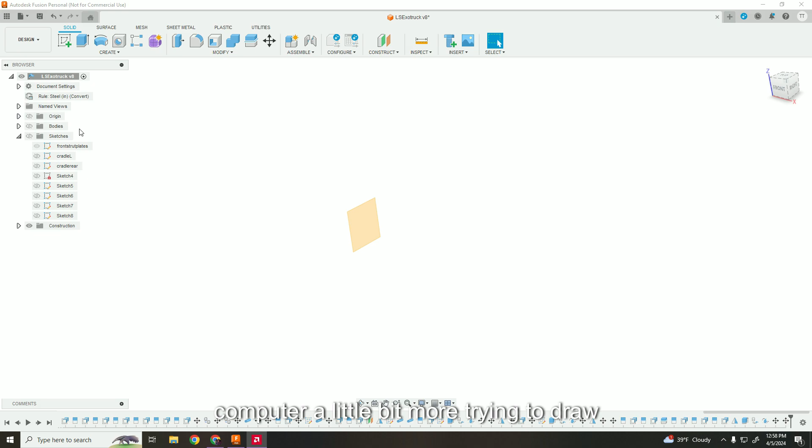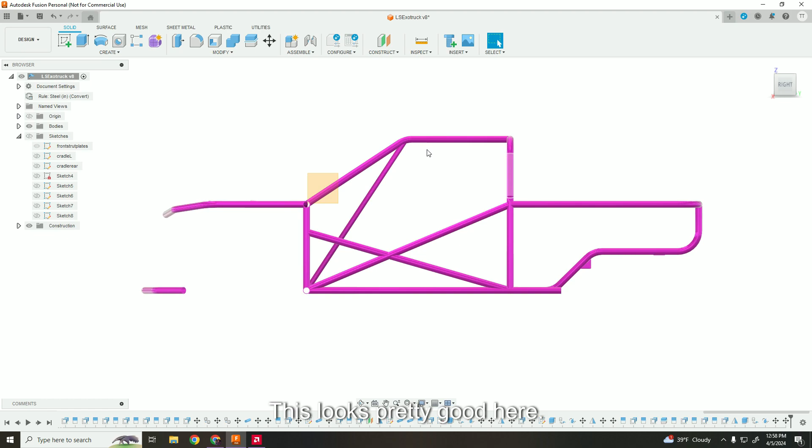So I've been sitting here in front of the computer a little bit more, trying to draw up basically the handful of tubes I already have bent downstairs for the LS truck. And this is pretty much what I've come up with so far. Obviously some of these tubes aren't done yet, but the whole point of this modeling thing is I can give it looks, and to me this looks pretty good here.

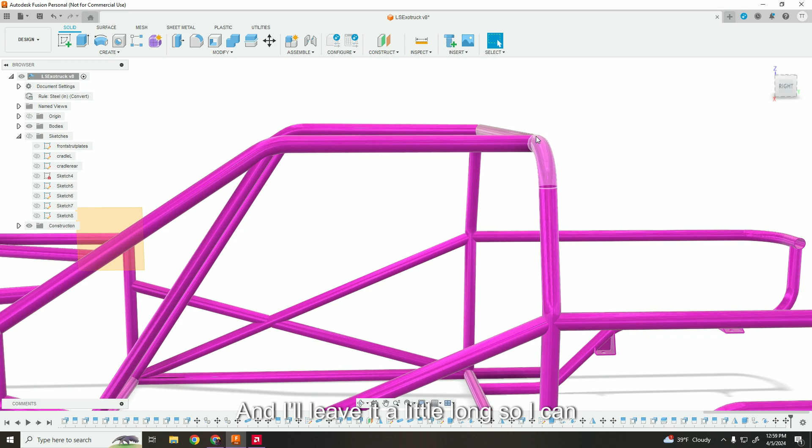So I know that bending this out is about 30 inches, and then down, I forget the dimension, but I could plug that into my Bendtech software and get this tube bent without trial and error basically. And then I'll leave it a little long so I can notch it. I usually take about a half inch off for notching. Down here there's a bit of a compound angle notch to it.

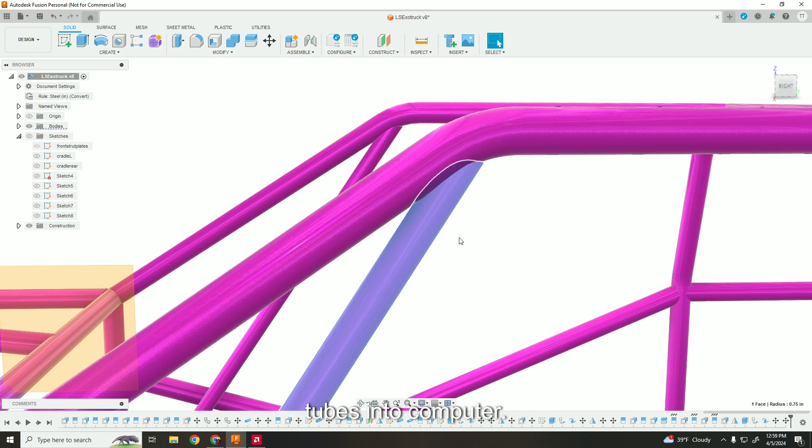And then this tube here, I can notch these tubes in the computer using commands like split face, and then you subtract. I'm not going to get into that. There's a lot of very good videos on YouTube already about using split face commands.

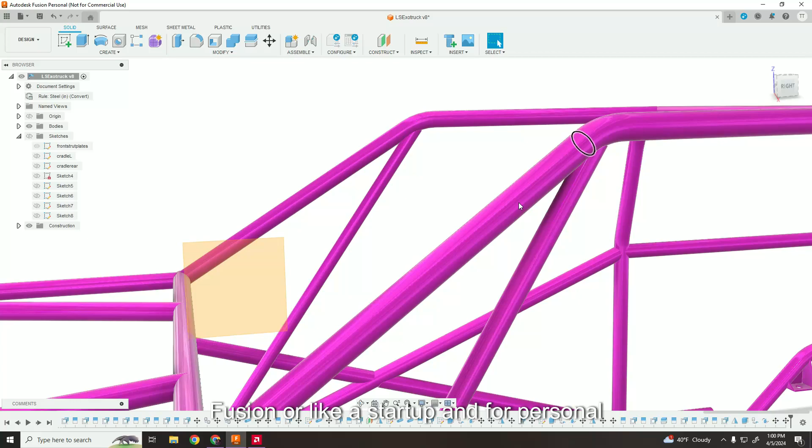But I never really used Fusion software until a couple years ago when I lost my AutoCAD at work. So it was definitely a learning curve. Some of you younger guys in school, this is probably a lot more natural because it's all you've worked on. I think Inventor's very similar, maybe even SolidWorks. But Fusion for a startup and for personal use is free. So I don't have all the features, but I have enough to draw these chassis.

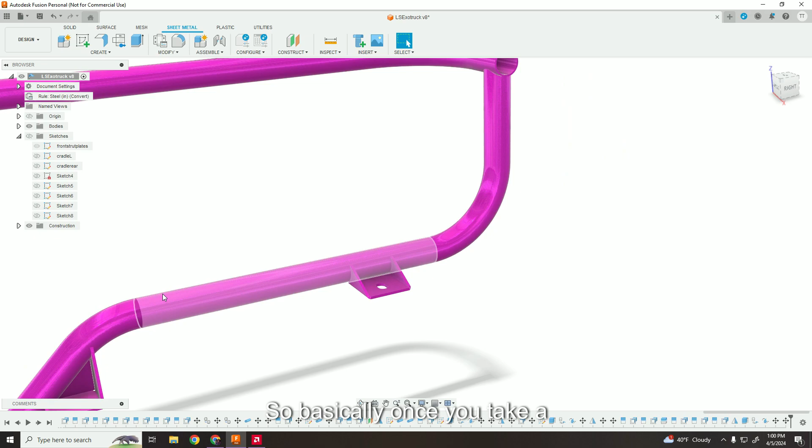Today, why I'm even making this video is I've learned how to use the sheet metal commands. So basically, let's see where my sketch is for this bracket. I gotta turn it on. That's not it, that's not it. 5, no. 6, no. Somewhere there's a sketch for this bracket. We'll use this one for example.

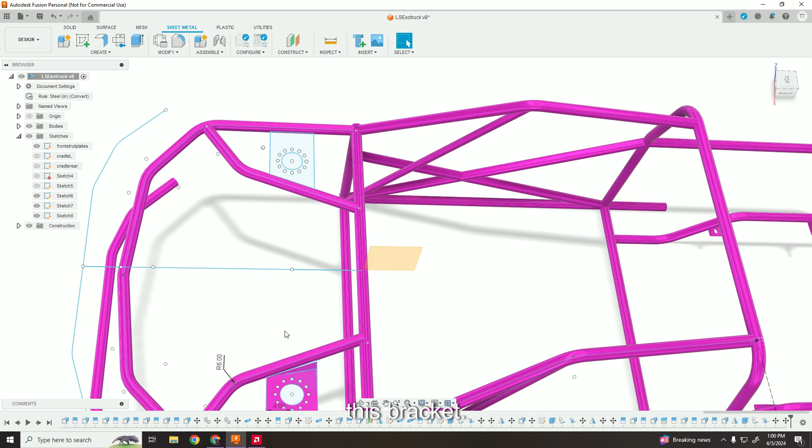I drew this up just to figure out a rough shape of what I was going to need to put in there. And then I can go up here to modify, sheet metal, create, and I can convert that extrusion. You got to extrude it so it's going away from these lines.

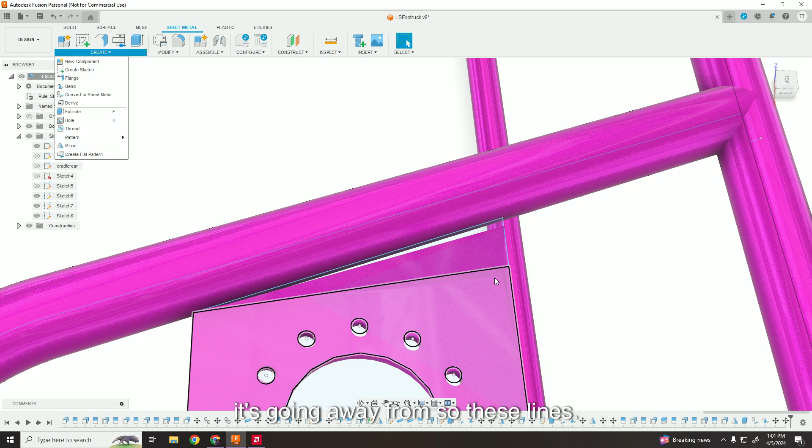Oh, my internet, this freaking Verizon, I swear to God, disconnects on this computer every couple minutes and then reconnects like 15 seconds later. It's always done this. I have no idea why. It's hardwired to the router.

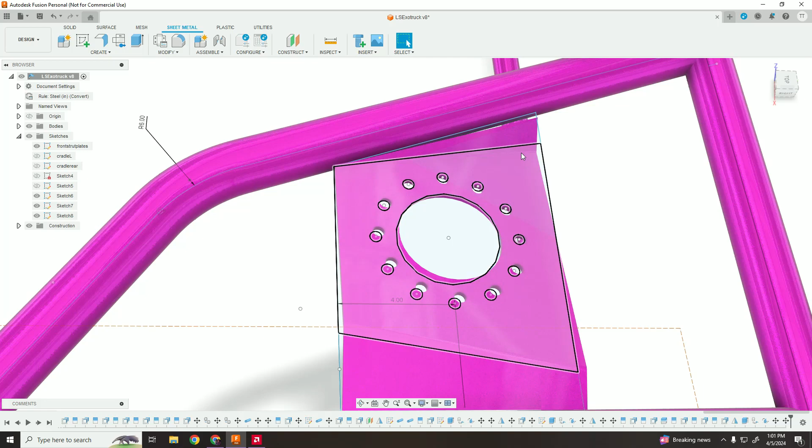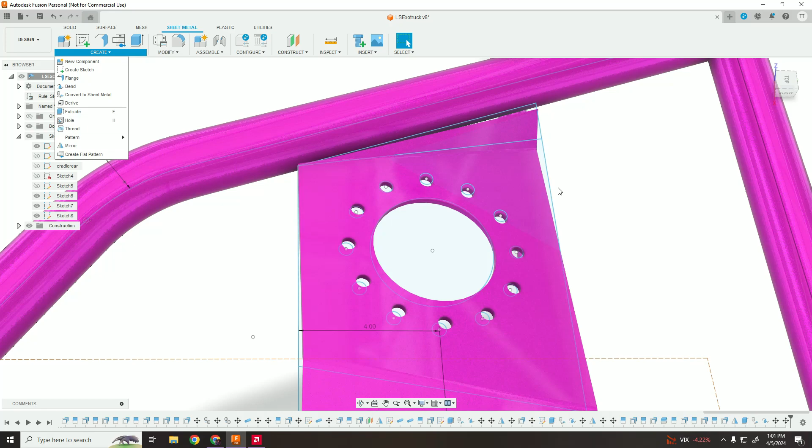But you keep the lines on top, and then once you convert your extruded piece from the sketch to a sheet metal, then you can bend it. And what that lets you do is bend it without having to draw it like that. And then once you're finished, you have your sketch still that you can export to a DXF or a DWG. And then from there, you can send it to a company like this, SendCutSend. That's who I use.

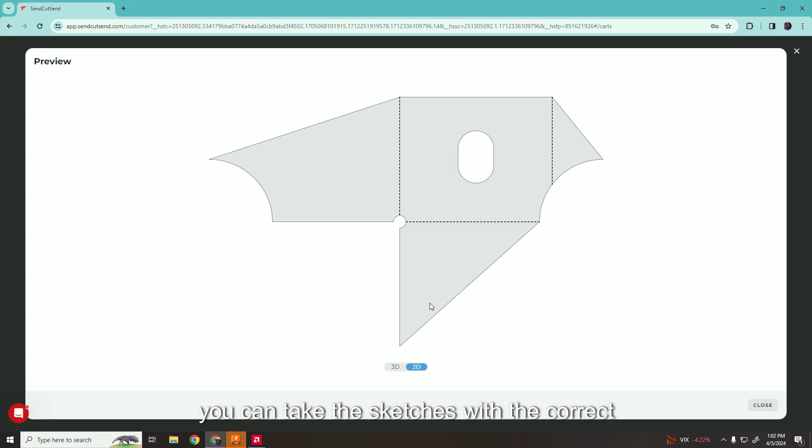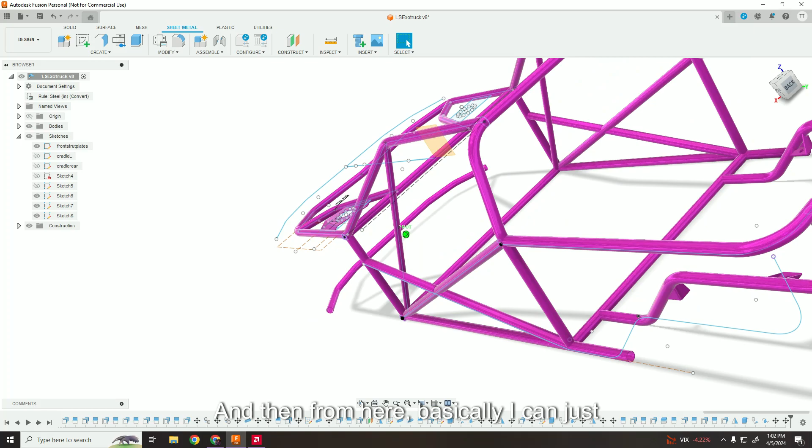There's a couple, obviously this ain't commercial. This is just who I use. And then you could take those sketches with the correct dash lines. They'll laser cut it and bend it out and give it to you as a part in the mail. And the costs aren't too bad. I mean, they're to be expected, but it's not outrageous. And then from here basically I can just keep drawing.

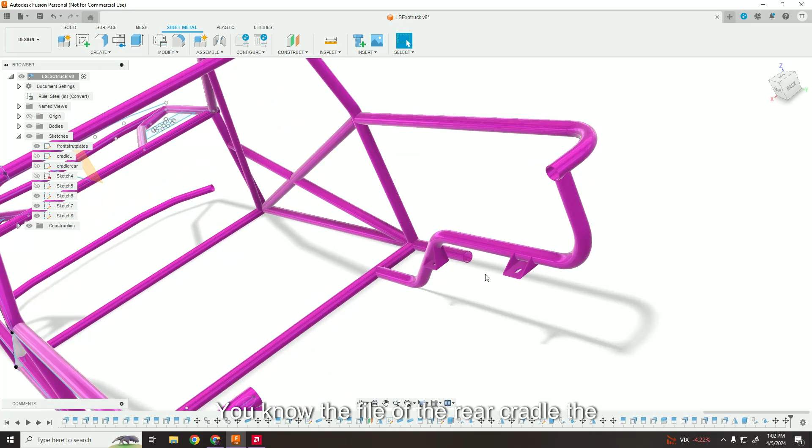Now what would make this a heck of a lot better is having a 3D scanner. See, to locate these parts, I couldn't just locate them in my model. If I had a 3D scanner, I could have imported the file of the rear cradle, but right now I still have to bend these tubes, go down in the garage, fit these brackets with basically cardboard, and then I draw them in here.

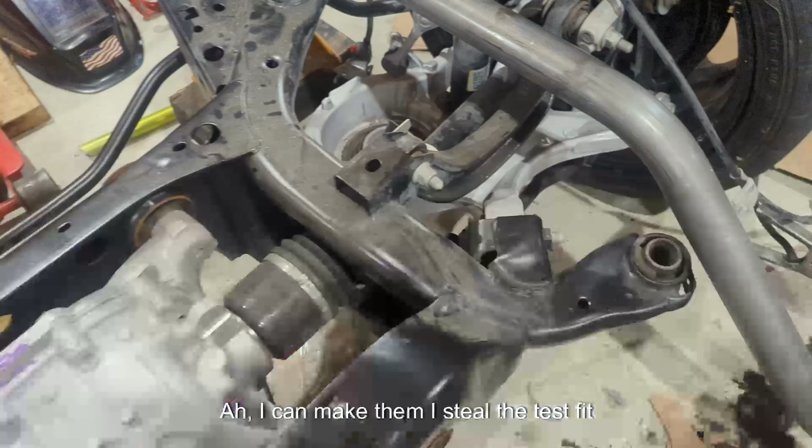I can make them out of steel to test fit, which I did for these couple, but this one I'm not going to make out of steel to test fit. I'm just going to draw it because I know it's